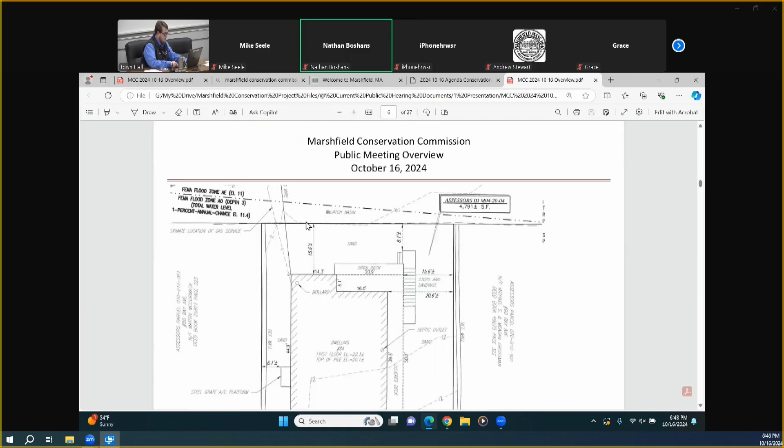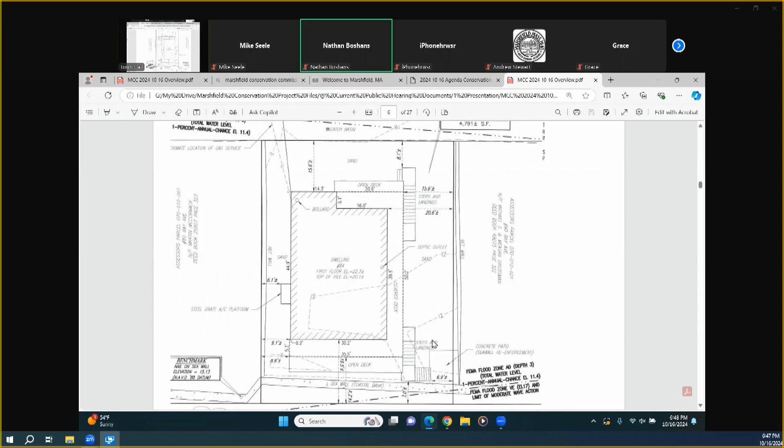This is when you're on Bay Ave, this is the street here. This would be the area where there's currently the paver area and the hardscape that goes underneath the home, neither of which is reflected on the plan. There is a portion of hardscape, a concrete pad to support the stairs over by the seawall, that's captured in the as-built, but that's really the only impervious hardscape noted on that site plan.

In the as-built, it shows sand there, whereas our original approved plan has a lot of that as concrete. So I guess when we got approved, I just didn't get everything rubber stamped to follow through.

So the slabs that you poured this summer—here's what the building commissioner has to say. The property is located in the R3 zoning district in Velocity Zone 17 and Special Flood Hazard Area, Barrier Beach Coastal Wetlands. There are no specific prohibitions on slabs in flood zones under the National Flood Insurance Program.

However, post-disaster assessments conducted by FEMA have concluded that unreinforced slabs with no wire mesh or rebar, less than 4 inches thick, tend to break up into small pieces without causing adverse effects. Reinforced concrete slabs thicker than 4 inches tend not to break up, can become dislodged, act as obstructions, and can transfer unanticipated loads to building foundations.

So are your slabs reinforced? No, they're fiberglass filled, no rebar. Do you know how thick they are? I believe they're 6 inches thick.

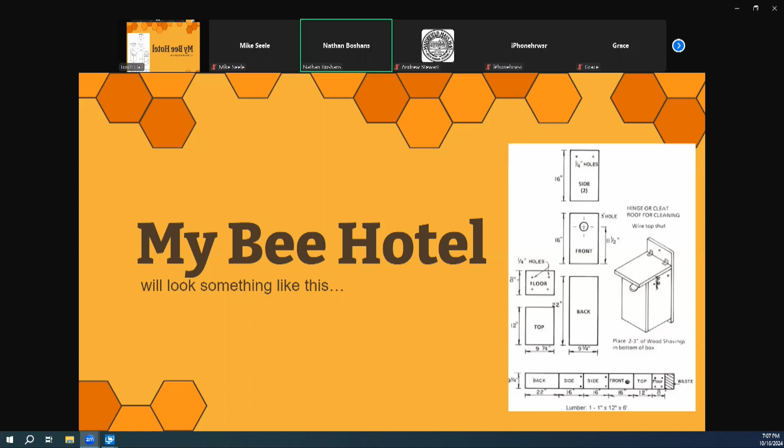Next slide please, here you see the blueprint, it'll look something like that. That's a blueprint for a birdhouse, but on the next slide you'll see the face of the birdhouse. It's missing, and it will instead be filled with all those little tubes, and that's where the bees will lay their eggs, and they'll live for the season.

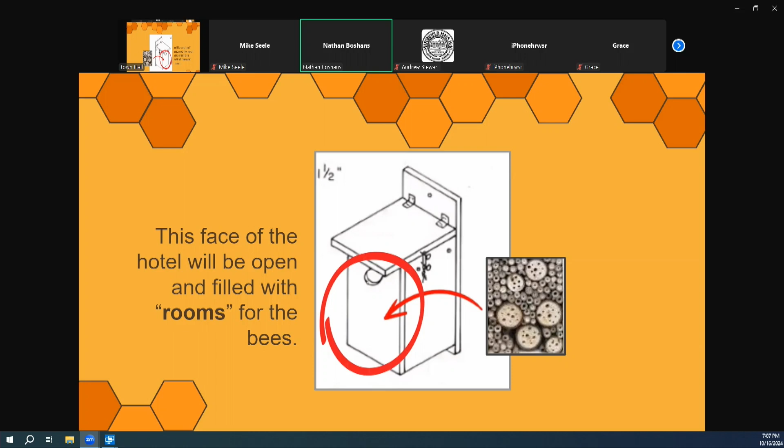I believe the next slide is, how do you mount the bee hotels? Instead of nailing them to the trees, I will just be attaching them with outdoor mounting straps and make sure that no harm's done to the tree, and they'll stay up there nice and secure. Now on the next slide, so there are a couple benefits. They're minimally invasive, they don't take up much space, they're the size of a bee hotel or a birdhouse, and they're environmentally friendly.

And they're very low maintenance. I mean, bee hotels are low maintenance to begin with, but considering that scouts will do all the maintenance for you, that means no one else has to do the work. So it's just the scouts.

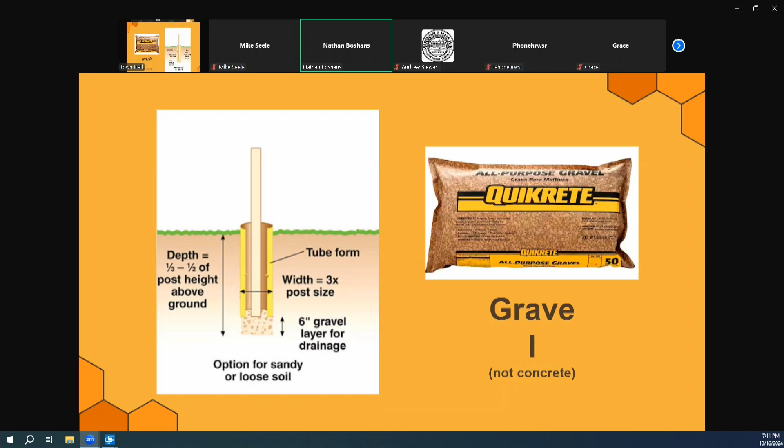And I do believe that's all I have. So, next slide, I think it asks if there's any questions. Okay. Thank you. Does anyone have any questions?

Looks good to me. I don't know a lot about bees, but having this close to the shed, is that going to attract bees to, are people going to be more prone to being stung?

No, because these aren't honeybees. If you were near a honeybee hive with 40 to 60,000 bees in it, you would be disturbing them. These are native bees, and they are solitary and not aggressive. They won't be living in these tubes, they use them for nesting and reproducing. Isn't that right? Yes, that is very well said.

Yeah, so that should not be any hazard to anybody working in the garden. Well, I'm sure the people at the community garden want the pollinators. Yeah, but are they aware of this? Did you talk to, I forget what the term is, but there's a manager up there of the community garden? Have you talked to them?

I did talk to somebody. I'm not sure exactly who they were, they were at the garden at the time. But with approval from the board, I think I can just go and talk to that person, whoever the manager or whatever. I just thought I'd get this out of the way first.

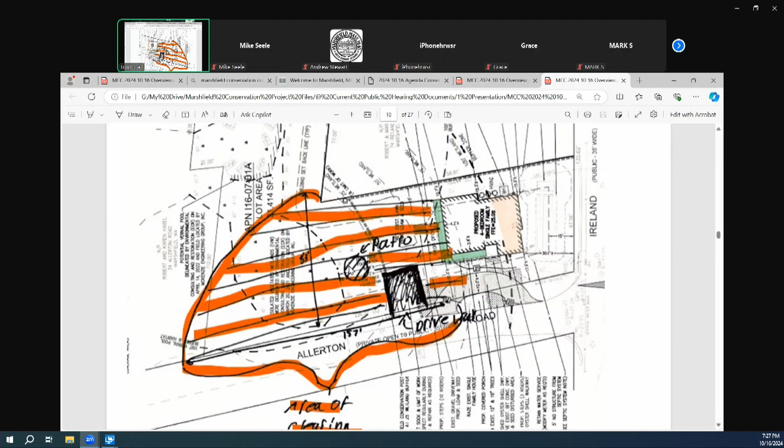They might be okay if they're on the border. Are they in the buffer zone? They're in the buffer zone. It doesn't appear that they're within the isolated vegetated wetland or what used to be it.

It's an isolated vegetated wetland, but they would certainly be right on the cusp of it. We need to get some good measurements and see what's there. But if you come in, we can give you wetland scientists to choose from, and you can file for an amended order, and then we'll have it come back to us.

See exactly where things are. Okay, will do. All right, thank you. Thank you. Appreciate it. Okay, that concludes the business.

On to public hearings. The first being 914 Webster Street. In compliance with the regulations of Massachusetts General Laws, Chapter 131, Section 40, the Wetlands Protection Act, and Code of the Town of Marshfield, Chapter 294, Wetlands Protection, a public hearing will be held by the Marshfield Conservation Commission on Wednesday, October 16th, to consider the request for determination of applicability filed by DD Realty Trust.

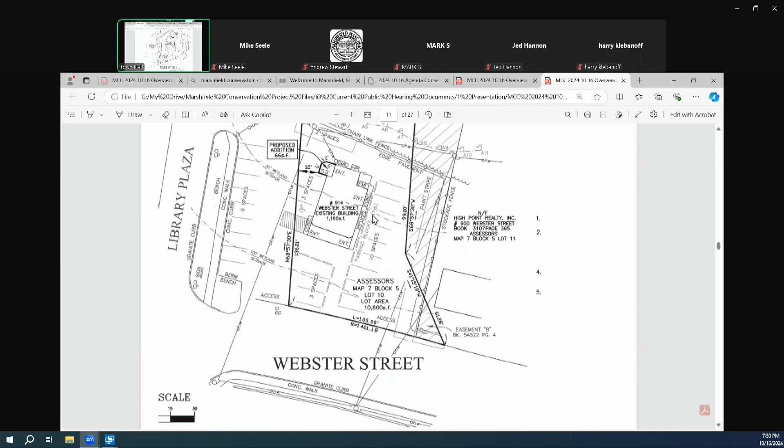And you want to read the conditions, Mike? Yes. Ensure best management practices are followed. Before commencing the work, obtain all pertinent permits and see the conservation administrator agent for work beyond the approved work activities.

May I have a second? Second? All in favor? Aye. Aye. Aye. Okay, thank you.

Okay, next up is 109 Constellation Road. In compliance with the regulations of Massachusetts General Laws, Chapter 131, Section 40, the Wetlands Protection Act, and Code of the Town of Marshfield, Chapter 294, Wetlands Protection, a public hearing will be held by the Marshfield Conservation Commission on Wednesday, October 16th, to consider the request for determination of applicability filed by David McSweeney of 109 Constellation Road, and the hearing officer is Commissioner Platt.

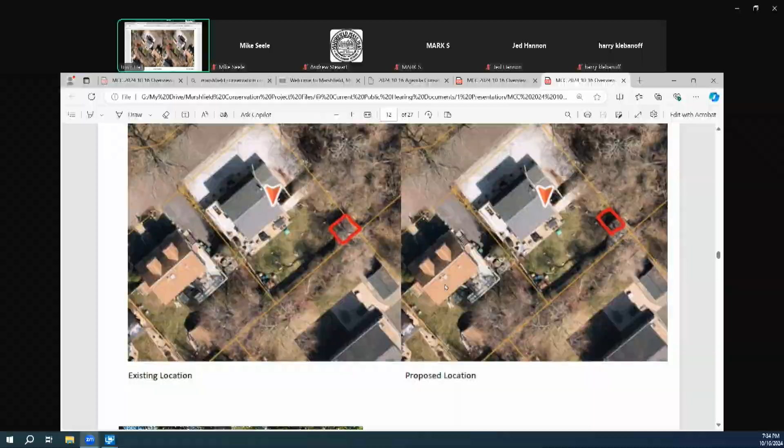Mike, do you have any comments? Yeah, essentially what you just said, I outlined here the intended areas of the shed. So this is the current location, and then he would just want to shift it over along this fence by a couple feet. Not a huge change. It would have to be on footings and have opposite flood openings, so on opposite sides of the structure there would need to be flood openings. Suitable footings could be sonotubes, helical piles, diamond piers, etc. This is in an AE9 flood zone.

And then the homeowner is also intending on doing some work under a different RDA, the fence replacement that was permitted under two years ago. That permit is still active, and he intends on doing the work about the same time that he installs the shed.

Okay, yeah, I couldn't get back there when I went, unfortunately, but I saw your pictures and everything.

Makes sense. Does anyone on the commission have any comments? Anyone in the public on Zoom have any comments or questions? Okay.

All right, then I am going to go ahead and move to close the hearing and issue a determination of applicability with a +5 and -2. Mike, do you want to read the conditions? Yes, ensure best management practices are followed before commencing the work, obtain all pertinent permits, and see the conservation administrator agent for guidance on work beyond the approved work activities. Okay, can I have a second?

Second. All in favor? Aye. Okay.

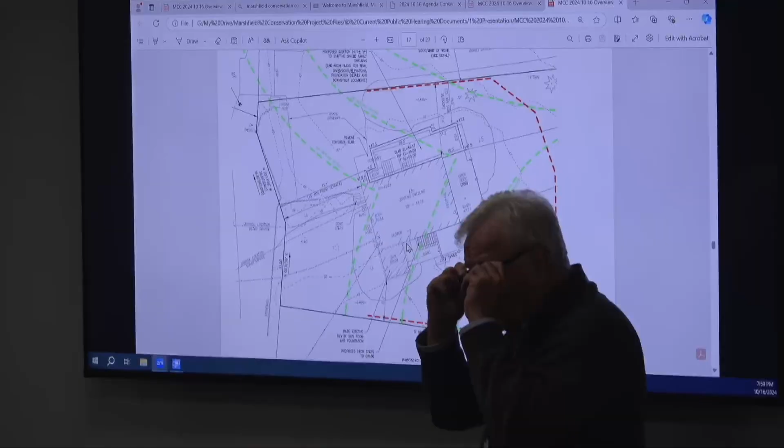That concrete will be taken out, that's where the concrete's coming out. We didn't have the building plan, just the plot plan. We were focused on that, and then this is the sunroom over here that's getting taken out, and some slab work over there. So one of the net effects of all that is...

The impervious area is going down slightly, but it's going down. I had an impervious area table, minus 111 square feet. It's reducing.

I was out there trying to sort it all out with all this, but I think I got a good feel for what's going on. As you said, the building commissioner has no comments, he's okay with the plan. I think most of the work is between the 50 and 100 foot. It's an existing structure, so there's not much changing there at all.

Michael, do you have any comments? Yes, as mentioned, there would be an overall decrease in impervious area from 2,168 square feet to 2,057 square feet. The proposed replacement deck will be on sonotube footings and will be within the same footprint of the existing deck. The addition will involve some removal of an existing concrete pad, as already stated.

I would suggest the following special conditions: general conditions 1 through 18 are standard. Prior to construction, condition 5 and 2, to ensure the site is staked out and to have a pre-construction meeting. During construction, condition 11, ensure best management practices are followed. After construction, condition 1. Erosion control, condition 1, to ensure erosion control is in place throughout the duration of work.